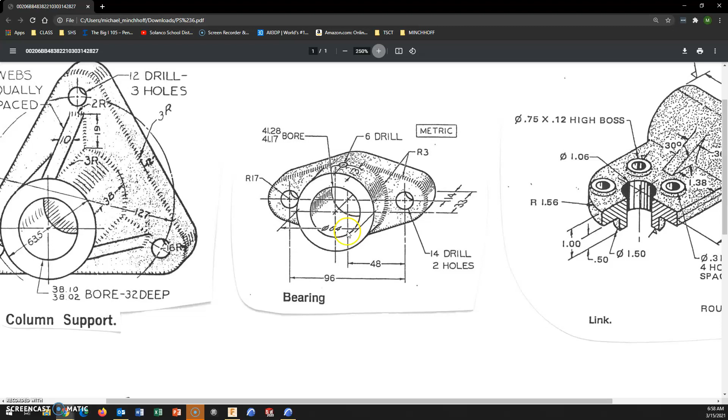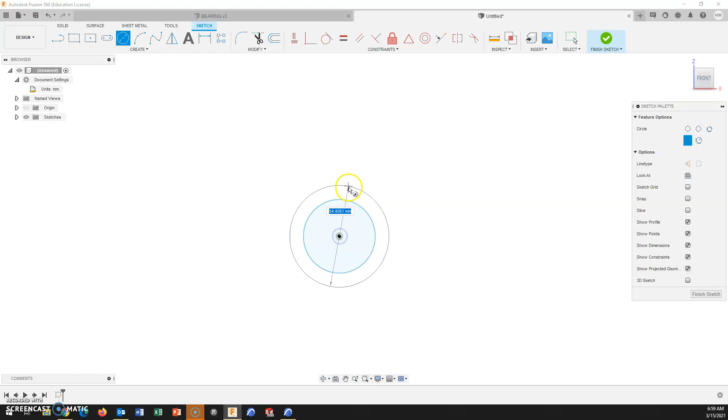In metric, machine surfaces on the bottom, all holes, and this surface here is machined. New design in millimeters. Again, by referencing the origin, we'll have a plane that we can come back and reference later. So we inside bore. We know that whether we mirror to the left or right doesn't matter. But I'm going to plan ahead and put a line to mirror about. Inside, outside radius. And then we'll add our tangent lines.

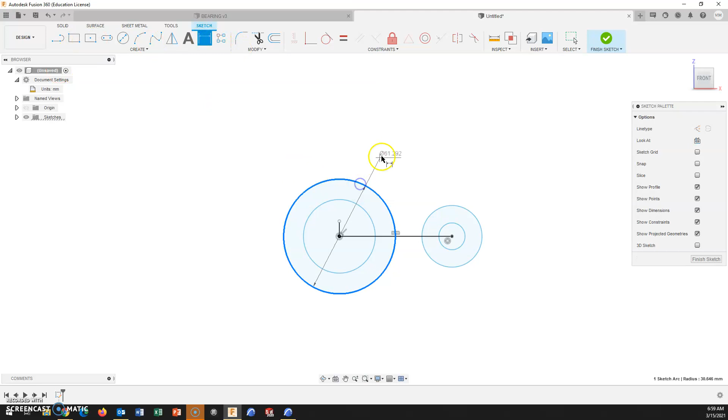So let's put some dimensions in that we know. We know that this outside bore is 64 and the inside does have a tolerance, high or low. And this really only plays a factor when we go to dimension this drawing later on. I'm going to start at the low end of the tolerance. We know the distance to the center is 48. They're horizontally aligned. We have an outside radius of 17. So 17 times 2 will give us our diameter. And an inside bore of 14.

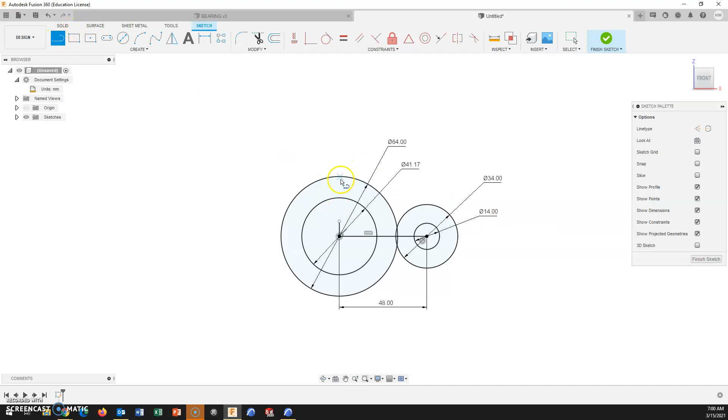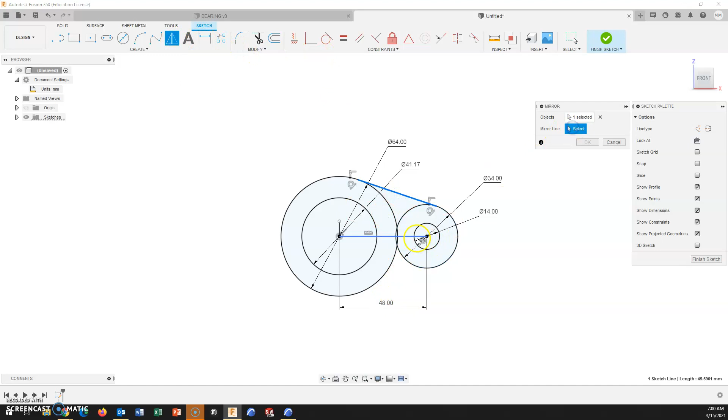Tangent lines. Adding the relationship here, if I start on this curve, I will not get a point of tangency, but I can create the point of tangency on the smaller circle. So I have to come back and add a point of tangency. So I can now mirror. I'll mirror top to bottom. And now I will mirror both of these tangent lines and this circle to the other side.

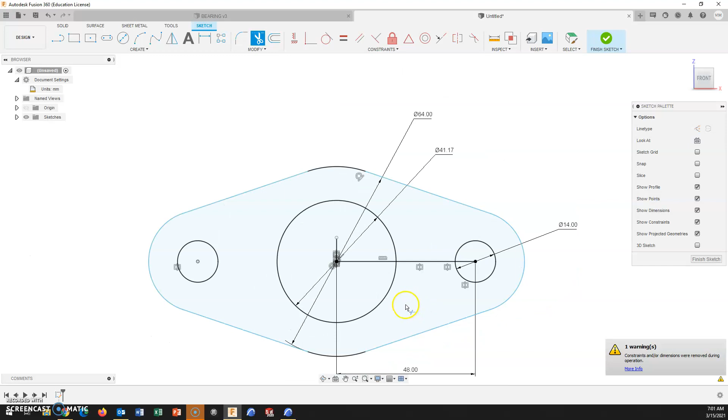There's my line to mirror about. And trimming. Back to this trim command. Before I was just selecting individual lines. If I click and drag, I can drag through entities to trim them off. And we're ready to go. Base thickness is 14 millimeters.

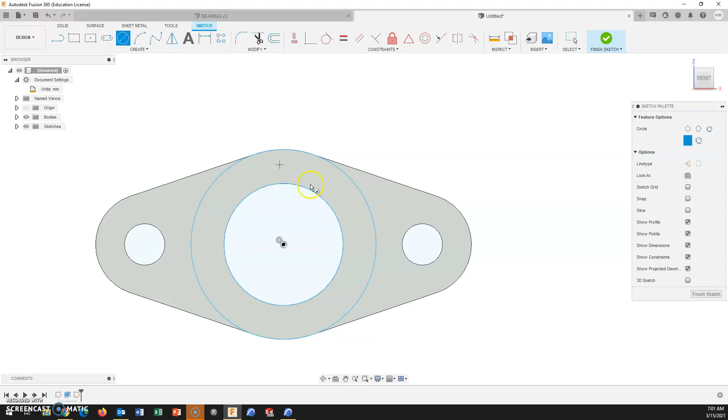Since I've started at the origin, I can reference and snap to create the bore or the cylinder. I've already created 14 millimeters worth of material, and the overall height is 33, so I do need to subtract. So 33 minus 14, if you can't figure out, that is 19. And I have this drilled hole.

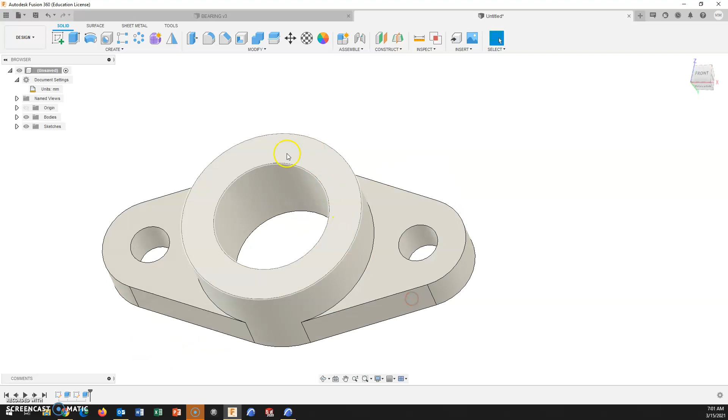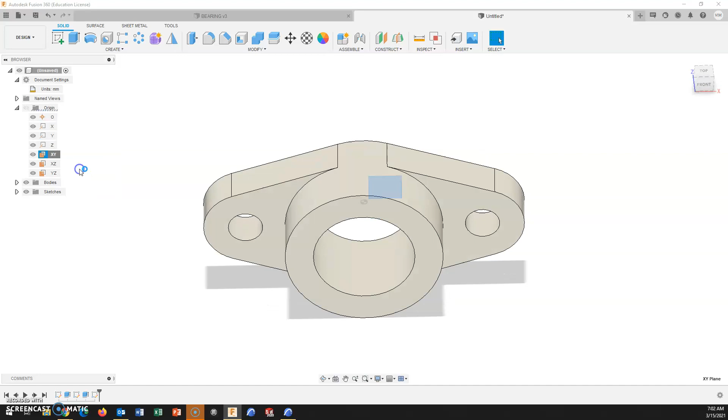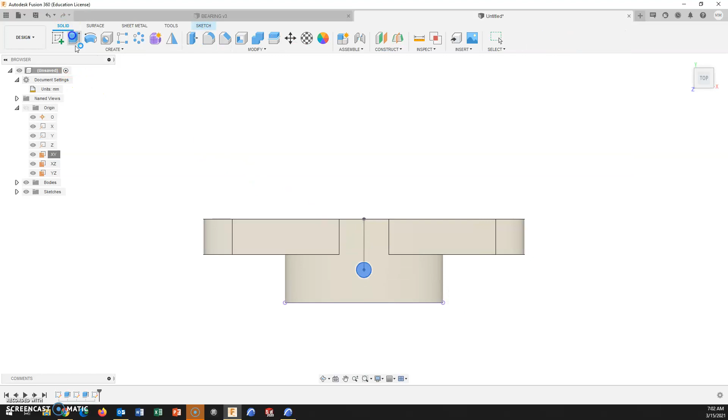So since I used the origin, if I come to my planes, I can see that this plane is here in the middle, and I'm actually going to sketch off of this plane. So if I right click, I can create a sketch based on that plane. I have an origin, it's in the middle. I have a 6 millimeter diameter hole, and it is 13 millimeters from the cylinder. And when I go to cut this, I'm only going to cut in one direction.

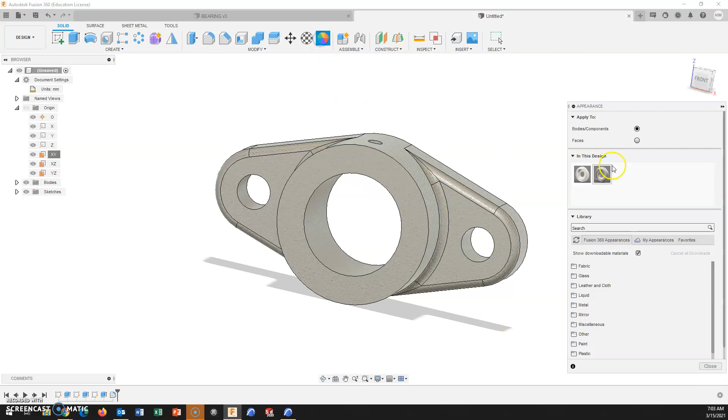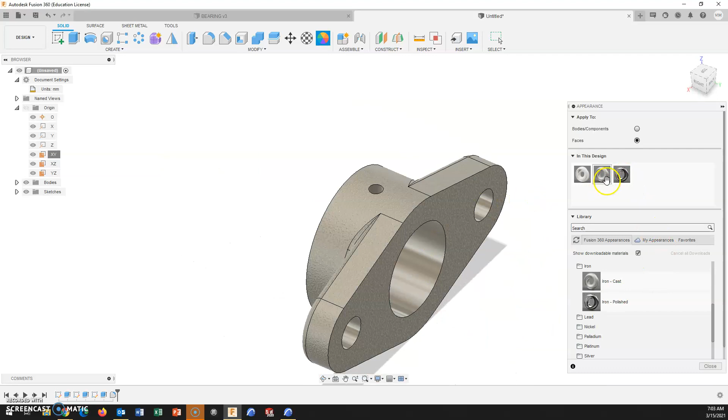Fillets, they are a radius of 3. Material is cast iron and machine surfaces. All holes are machined, and the back surface on this one is also machined. There are no fillets. And there you have the bearing.